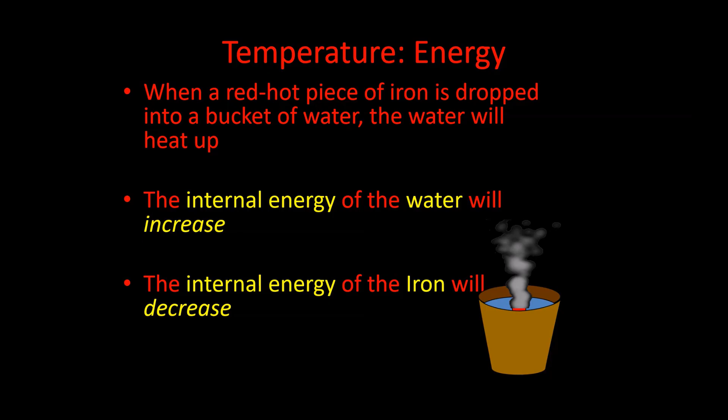In terms of reactions that can take place, some reactions are considered reversible, some are irreversible. Such a thing as freezing water and then subsequently melting it back into liquid state is a reversible reaction. We can take our water in its solid form as ice, melt it into liquid, then reduce the temperature and regain our solid ice state. This is a reversible reaction.

Examples of an irreversible reaction are such things as chemical reactions. So take CH4, methane, and O2, oxygen, and combine those together to get CO2 and H2O, carbon dioxide and water. On the surface, it might seem that you could put H2O and CO2 together and then regain CH4 and O2. This, however, is an irreversible reaction.

The energies and bonding required to take these two, CO2 and H2O, and get the original reactants back are quite complicated. So you'd have to catalyze this reaction and go through a chain of reactions to come back and get CH4 and O2. You cannot simply put these two together, rearrange them, and get these two back. This is an example of an irreversible reaction. You can do this, but it requires a completely different path.

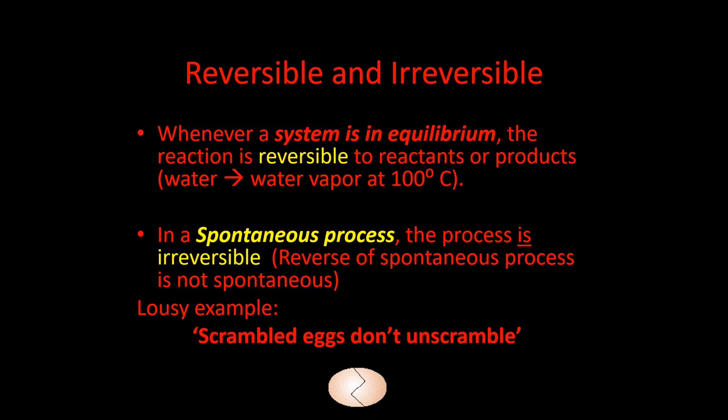An example of this is taking eggs and scrambling them. This might sound a little bit ridiculous on the surface, but it is a good example. If you take an egg in its intact state and then scramble it, you've increased the chaotic state of that egg. You cannot unscramble that egg and reform it and get a nice complete yolk once again. It just won't work. You've increased the entropy of that egg to the point where it cannot be reformed.

And these are really all statements that fit within the second law of thermodynamics, or at least pertain to it. The second law of thermodynamics really states that the entropy of the universe is always increasing in a spontaneous process and remains unchanged in an equilibrium process. Really, what the second law of thermodynamics tells us is which processes in the universe can occur and which cannot.

And we can look at this on a variety of levels. We will eventually take it down to the level of just looking at thermal cycles. But right now, there's bigger pictures to look at. So in terms of entropy, what is it? Entropy is a measure of randomness or a measure of disorder. If you increase disorder or increase randomness, you increase the entropy of your system.

So the entropy of any isolated system will always increase over time and approach some maximum value. If you leave a system alone and do not maintain it, it will tend towards a state of greater and greater chaos, less and less order. For instance, you could look at this on the macroscopic scale. What happens if you have a building and don't maintain it and just leave it to its own devices? Eventually, weather and decay will cause it to fall apart. Its chaos will increase. Its entropy will increase.

So the entropy of a thermally isolated system should never decrease. Now, if we mean a thermally isolated system, this is not contravening the previous statement. We're talking about a situation such as a calorimeter, where there's no exchange of energy with the exterior system. We're just taking water inside there and adding metal, then leaving it completely isolated.

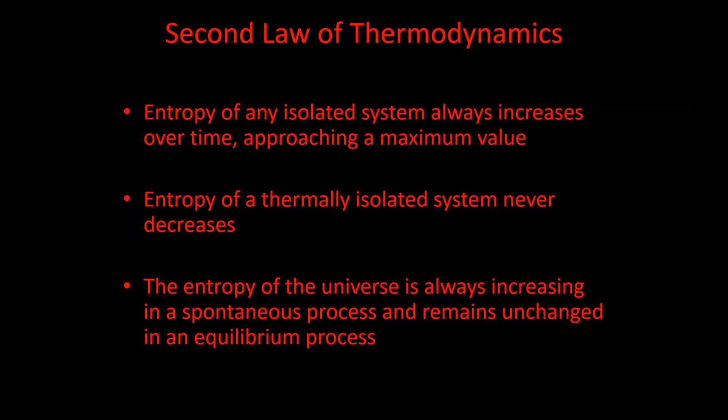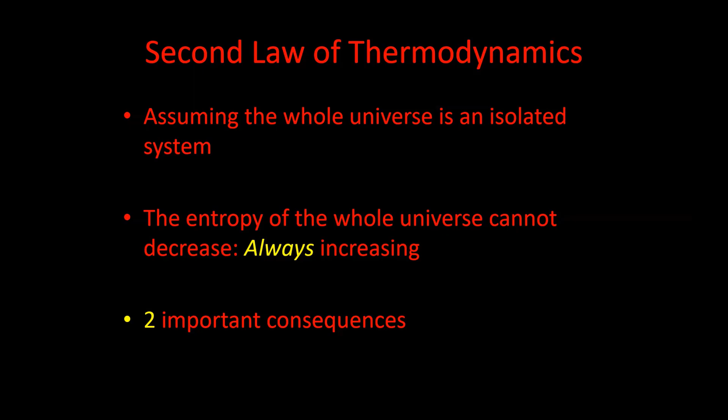The entropy of that system should not decrease, because there's a set amount of energy that is exchanged. A larger statement of this is that the entropy of the universe is always increasing in a spontaneous process and remains unchanged in an equilibrium process. So it really is a statement of conservation of entropy. If we assume our whole universe is an isolated system, the entropy of our whole universe cannot decrease, it's always increasing. And there's a couple of important consequences to this that we will come to.

But when we're talking about the universe, here is the beginning of the universe. Energy was released at the beginning of the universe in a radiative sense. And what's actually happened since is energy has reordered itself and become far less chaotic and reached a state of lower entropy, essentially. And we've got matter.

But energy is constantly being exchanged, and what's happening is the entropy of the universe overall, everywhere, will increase. The entropy of the universe is indeed increasing, and the radiative energy and gravitational energy that we see in the universe today is being converted to other forms, possibly things like dark energy. Eventually we will end up with a dark and desolate universe where all of the energy that we depend on, gravitational, radiative, all of this, has been turned into a form which is unusable to us. But we're talking billions of years in the future, and we're not necessarily worried about this.

Something to think about when you're lying awake in bed at night.

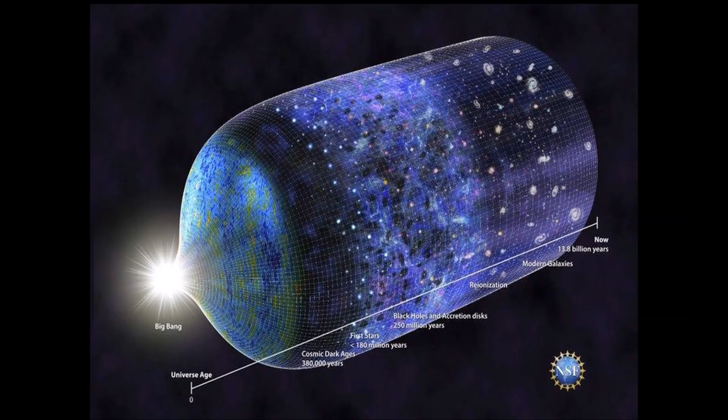So, let's get down to thermodynamics. What does the second law of thermodynamics really say for us in terms of heat and heat transfer? It means that heat cannot pass from a colder to a hotter body. We looked at that with the iron. If we drop our piece of hot iron in the water, the energy flows from the hot iron to the cold water. It would not flow from the cold water to the hot iron.

It's impossible for any device that can operate on a cycle to receive heat from a single reservoir, that means a supply of heat, and produce a net amount of work. That means you can't get work from nothing. Heat must flow from hot to cold, and then you extract work from that process. So we can only get useful work out of heat if it's transferred from a hot to cold reservoir.

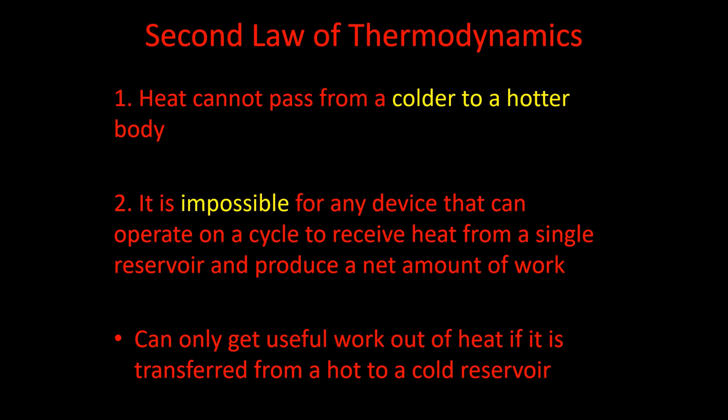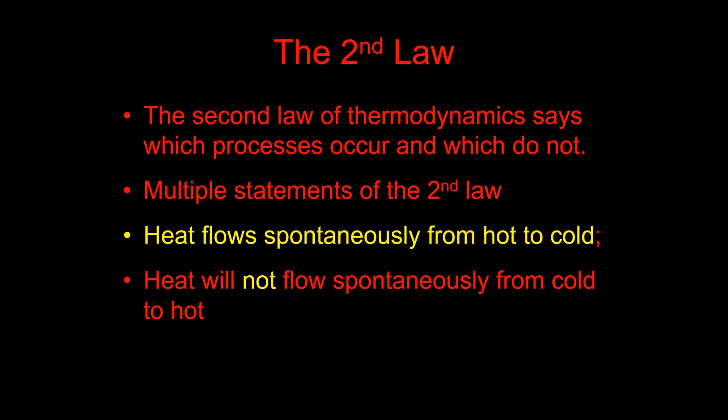So really, what the second law of thermodynamics is saying is which processes occur and which do not. There are many, many ways of stating it. For us, we're going to say heat flows spontaneously from hot to cold and will not flow spontaneously from cold to hot. We can transfer energy from cold to hot reservoirs, but then we will have to actually put work in to achieve this, and we will discuss that later. But naturally, heat will flow from hot to cold.

So there are multiple statements of entropy that you will see in different places. Our formula for entropy, at least one of them, there are two, is that delta S, the change in our entropy, is quite simply put the final entropy value minus the initial entropy value. I'll show you how to calculate S shortly.

Other statements: a quantitative measure of the amount of thermal energy not available to do work in a closed thermodynamic system, that's entropy. What this really states is entropy is kind of an efficiency. It's how much energy is not available for you to extract from your machine. So you have a certain amount of heat, Q, and want to do a certain amount of work, W. But entropy stops you from converting all of Q into W. It's how much energy is unavailable and too chaotic to use.

You can also see entropy quoted as a measure of disorder or randomness in a system. In IT terms, it's a measure of the loss of information in the transmitted message. As we've said before, it's also the tendency of all matter and energy in the universe to evolve towards a state of inert uniformity, very cheerful, and, as we're seeing possibly today, the inevitable and steady deterioration of a system or society. Entropy's units are J/K, joules per Kelvin.

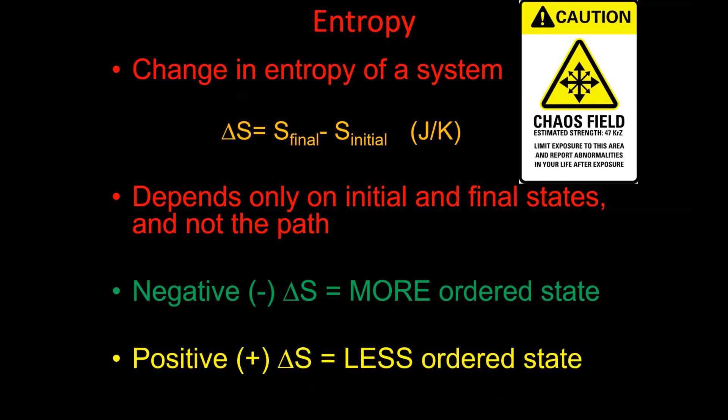So as we said before, the second law of thermodynamics actually holds a lot of different things within it, a lot of different conclusions. So the final fate of the universe, this energy going towards some dark, non-radiative form where we will see a dark and flat universe.

Ice melting to water, or water being frozen back into the form of solid ice. The degradation of your professor's office over a semester.

The Egyptians had this kind of idea, not so much scientifically in the form of entropy, but they actually had two goddesses, Ma'at and Isfet. Isfet being chaos and Ma'at being order, and Ma'at and Isfet were always fighting in the universe as to which one should win, chaos or order, and always coming to a balance. So quite scientific, even though it wasn't really intended. And of course, Little Miss Tidy could become Mr. Messy.

So, typical processes that will lead to an increase in our entropy are the melting of a solid, dissolving a solid in a solution, putting such things as sugar or salt into water and dissolving them, taking a solid and making it into a liquid or a gas, just increasing the temperature of a substance, or when a gaseous reaction produces more molecules. If there's no net change in the number of gas molecules, you can have a positive or a negative value depending on what's going on with the system, but it will generally be a smaller change in S.

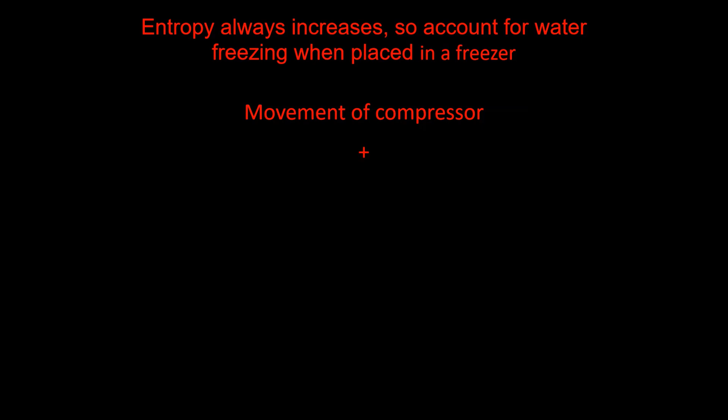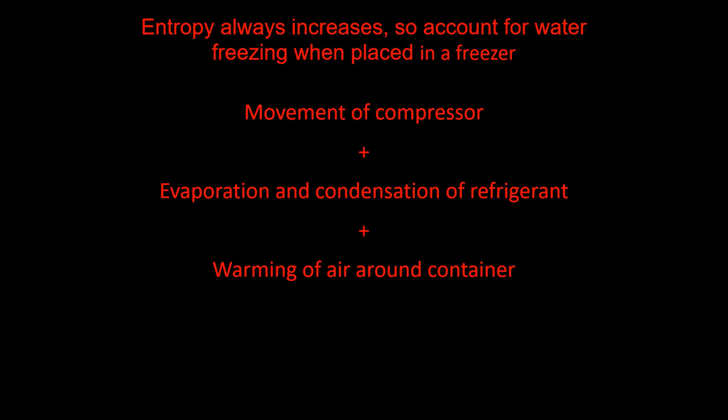So what that means is if we are going to freeze something, we usually pump some kind of refrigerant through the freezer, and that refrigerant will take energy out of the system and allow you to freeze your water. That means the movement of the compressor plus the evaporation and condensation of that refrigerant plus the warming of the air around the container, because we have to take that warmer energy and dump it somewhere, usually warming the air as the refrigerant lets its energy go, gives us a net increase in the entropy of the universe.

So we reduce the entropy of the water at the cost of increasing the entropy of the universe in 3 locations: by the movement of a compressor, the evaporation and condensation of a refrigerant, and the warming of air around the container.

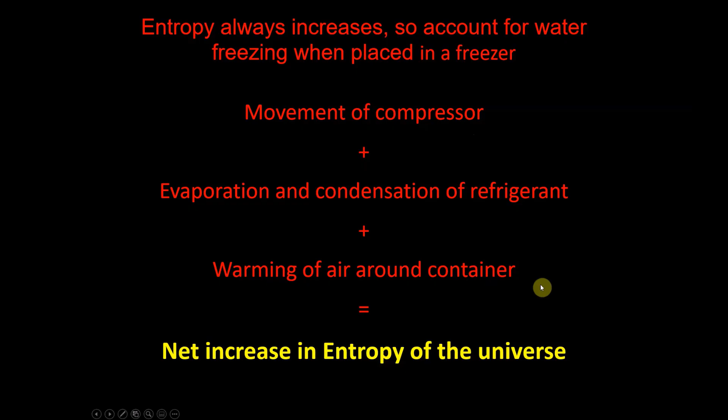We said essentially delta S was S final minus S initial, a relatively simple calculation. So how do we get our S values? Well, our S values actually come from a study of molecular structure and quantum mechanics, which allows us to calculate entropy theoretically for most systems.

Most substances will use some kind of calorimetric measurements, as per the calorimeter, at pretty low temperatures to achieve this. So our equation becomes delta S equals Q over T. In most cases I've used uppercase Q, here it's lowercase, but this does not really matter. Q here is the heat energy absorbed by the system, T is its overall temperature, and delta S is its entropy. So entropy is a ratio of how much heat energy is in the system to how much the temperature increases.

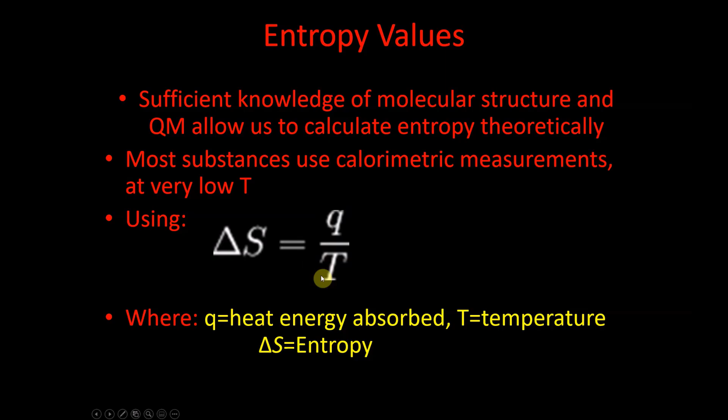So there's our equations together. Delta S can be S final minus S initial, or delta S equals Q over T. Since Q is heat energy and T is temperature, that means S comes out in J per K, or joules per Kelvin.

The entropy of a system really depends on its internal energy and external variables such as volume. We're coming to another equation that involves the energy of a system and relates that to S. In some thermodynamic limit, you can get an equation relating the change in internal energy to the changes in entropy and things such as volume. That's the fundamental thermodynamic relation.

And here it is: if the volume is the only external variable, then the relation becomes delta E, the total energy of the system, equals T delta S minus P delta V. T is the temperature, delta S is your change in entropy from either formula or both, P is the pressure, and delta V is the change in volume. So we've made a few relations here.

Let's take a look at a problem. We have a 10 kilogram block of water ice taken from a refrigerator at 0 Celsius and placed in a warm environment. Several minutes later, exactly 50% of the mass of the ice has melted, becoming water at 0 Celsius. What is the change in entropy of the ice-water system? So we're melting a 10 kilogram block of ice and waiting for 50% of the mass to melt. What's the change in entropy?

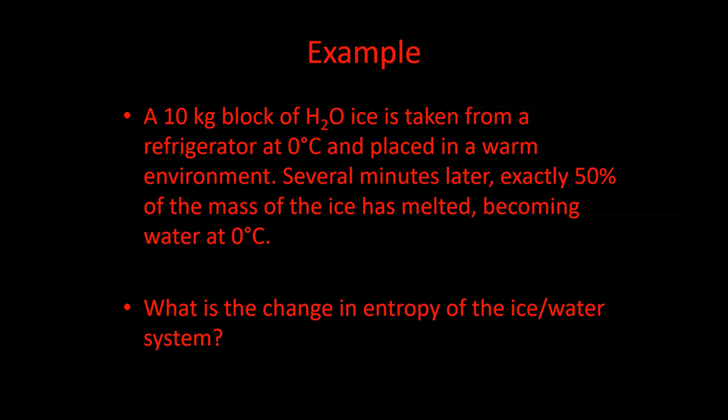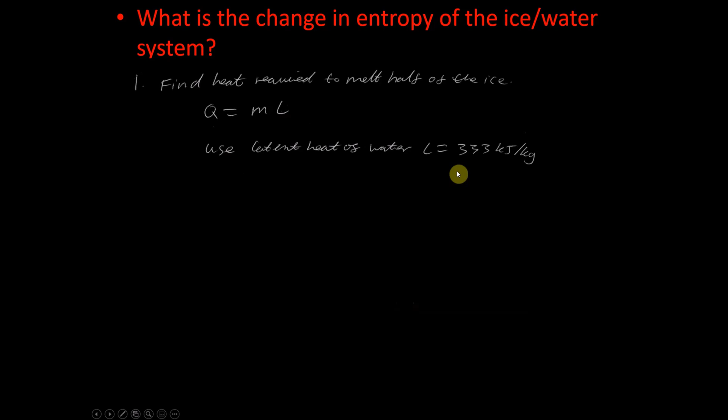First, let's find the heat required to melt half of the ice. You should be harkening back to what we discussed in calorimetry and realize this is a melting situation. So Q is equal to mLf, where Lf is the heat of fusion. The latent heat of fusion for water is 333,000 joules per kilogram, given here in kilojoules. So Q equals mL.

The mass we care about is when 50% of our 10 kilograms is gone, so this is 10 kilograms over 2, times 333 kilojoules per kilogram. This gives us 1,665 kilojoules. This gives us Q.

We're not done yet. We know the temperature of our system is 0 Celsius, which translates to 273 Kelvin. We have 1,665 kilojoules divided by 273 Kelvin. Converting the kilojoules to joules gives us 6,098 joules per Kelvin. That's how you arrive at delta S, the entropy change for ice moving into water. First find Q, compare that to T, delta S is Q over T.

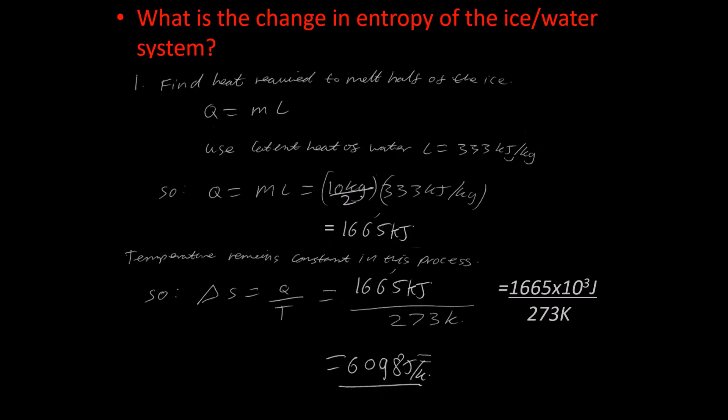Entropy places constraints on the direction your heat transfer can go, and also the efficiency of a heat engine. Delta U, the change in internal energy of a system, is equal to Q, the total heat energy available to the system, minus how much work you can extract. You cannot extract heat from a hot reservoir alone; you must exhaust it to a cold one. So heat must flow from hot to cold, and then you can extract work from it. You can never get 100% of the energy out of this situation, you can never have a 100% efficient heat engine.

So let's look at the second law, and specifically how this relates to things like heat engines.

So when we're talking about a heat engine, we're talking about an engine from which we want to extract useful work. That's the purpose the engine exists for. We have some amount of heat energy at QH, a hot temperature, and we're going to exhaust this to QC, a cold reservoir.

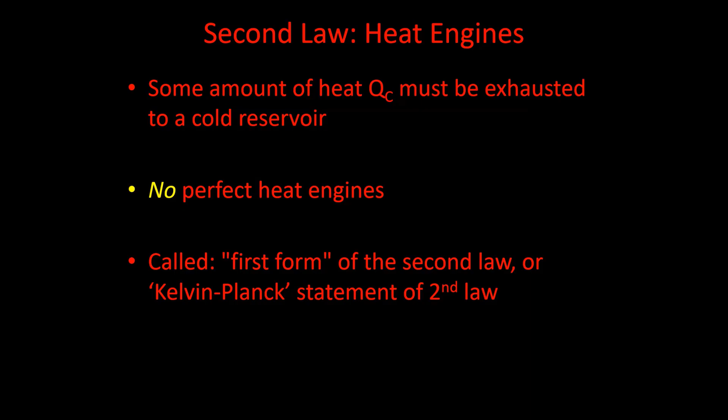When this occurs, we can extract a certain amount of useful work. We can take some of this energy and divert it to do some work. So we're going from 600 to 300, QH to QC. If we have a 600 Kelvin heat engine that exhausts to 300 Kelvin, this means the engine cannot be more than 50% efficient. We cannot take away more than 50% of the energy in the form of work.

We could reduce this to 200. We could change this value and exhaust to ever colder temperatures and increase the efficiency of our system. This system, from 600 to 300 Kelvin, only gets 50% of the work.

This is analogous to creating an engine from a water wheel. In a water wheel, we would have water contained at some height h with energy given to it by the gravitational potential energy of mass times gravity times height. This body of water would fall and impart this energy in the form of kinetic energy to this water wheel. There would, of course, be loss in the water wheel, which we'll ignore.

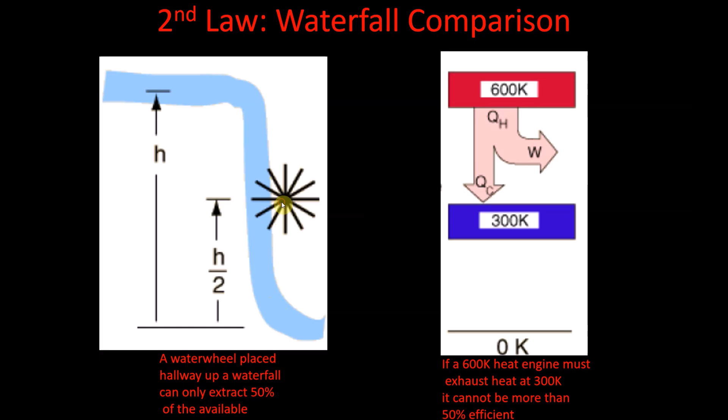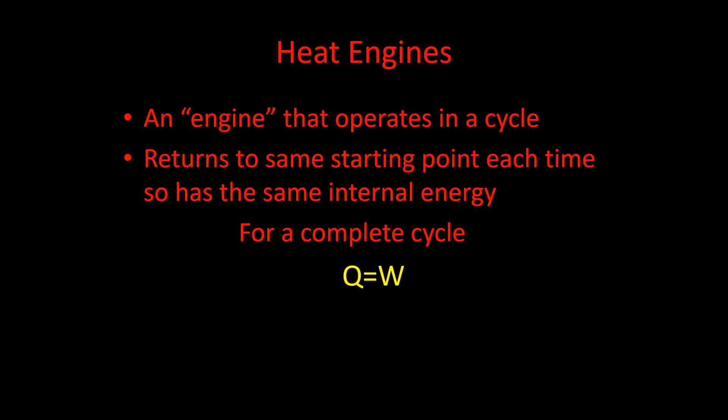So any engine that operates in a cycle is referred to as a heat engine, and this engine will return to the same starting point each time its cycle has ended. This has the same internal energy at the end of its cycle. This means for a complete cycle, the amount of heat energy put out should be equal to the work.

So a heat engine has to have a temperature difference. If the temperature is equilibrated, then the work done in one part of the cycle equals the work done by this other part of the system. So the net work is zero.

We cannot exhaust a 600 Kelvin heat reservoir to a 600 Kelvin heat reservoir. We could go from 600 to 300, or 600 even to 550, which would be very inefficient, but we could do it. But if you have an equilibrated system, then no work can be done.

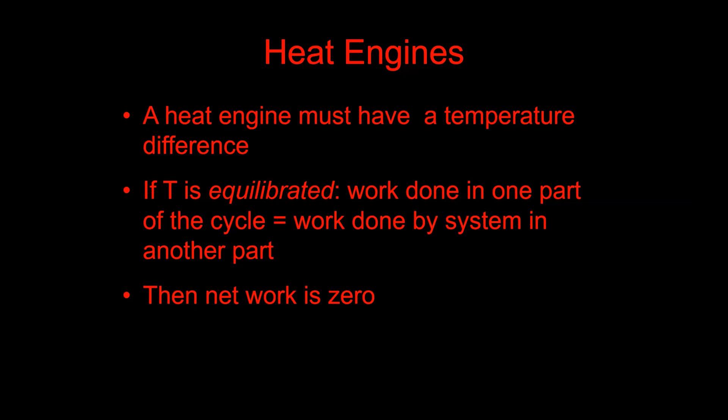So all real heat engines will lose heat to the environment. You cannot extract all of the work from a system. Here's our hot reservoir, and here's Q flowing out. We cannot divert all of this simply to work. We must send a certain amount of energy Q to the cold reservoir and then siphon off what we can in terms of work. The efficiencies here tell you how much work we can take away from this system.

So the efficiency here is either work over QH, the Q at the hot reservoir, which is essentially delta Q, QH minus QL over QH, or E is more simplified, 1 minus QL over QH. Using one of these equations really depends on what variable you're given.

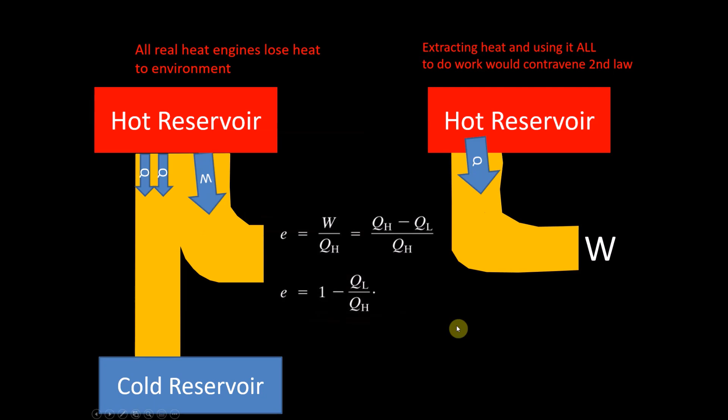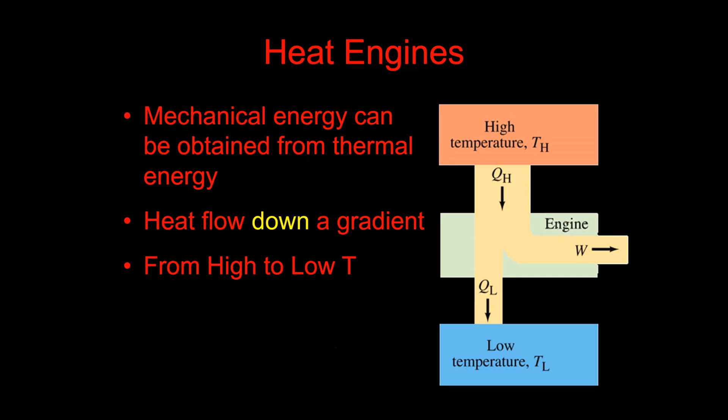We'll see these again. So in terms of a heat engine, mechanical energy can only be obtained from the thermal energy in this system. So heat flows down our gradient from high to low, and we extract useful work, W.

So those were schematics showing the energy flow in a heat engine system. Of course, the engine itself is a little more complex. You do have to have other moving parts, valves and such, and cylinders expanding and contracting.

The losses we're going to talk about are the losses due to thermal energy. We're not going to worry about the inefficiencies of whatever machinery you hook up to the system, which again will result in a loss of energy.

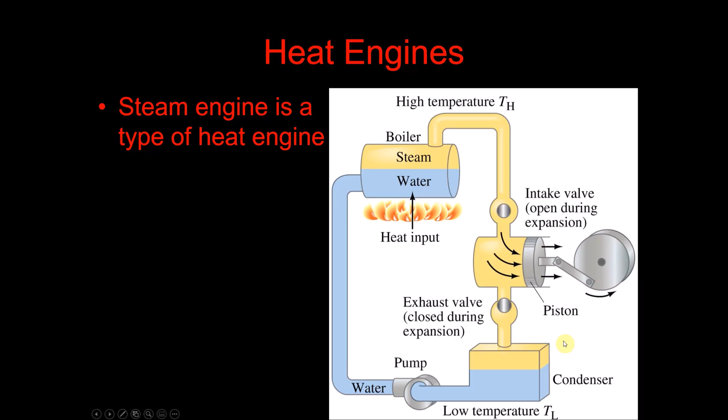So as we said, engines run on a repeating cycle, and the change in internal energy over one cycle is zero because essentially your engine returns back to its original position.

We have a high temperature reservoir which transfers heat, and then we take some of that energy as the heat is exhausted to a lower temperature, a lower energy. We take some of that heat in the form of work.

So in dealing with the work done by a gas, we can look at the work done in a mechanical sense. This means the motion of a piston. In a complete cycle for our system, this piston will come down and then return to its original position.

If our situation is such that the piston moves down and then returns to its original position, S is 0, so work becomes 0. That's not to say this engine has done absolutely no work during its motion. Half a cycle will essentially do work.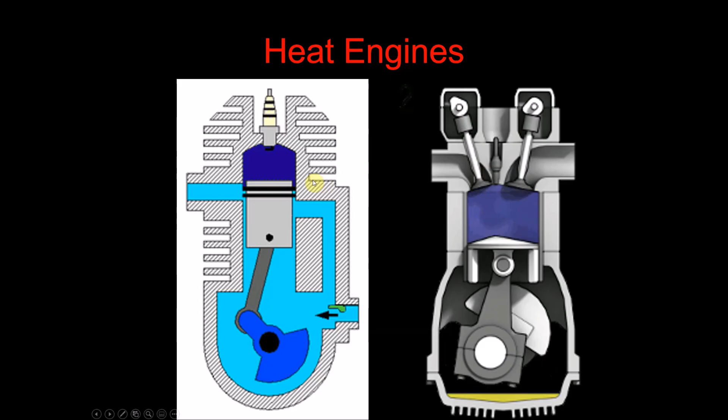In the case of a diesel engine, it's the actual compression of the oil itself that causes it to essentially spontaneously combust without the need for an extra spark. And of course, basic steam engines operated on such a principle. Here we can see the hot air causing expansion and the contraction in the cool air.

So that's the complexity of steam engines, was essentially the mechanisms attached to them to extract the energy. The actual principles on which they're based are those we're discussing here, which are not terribly complex.

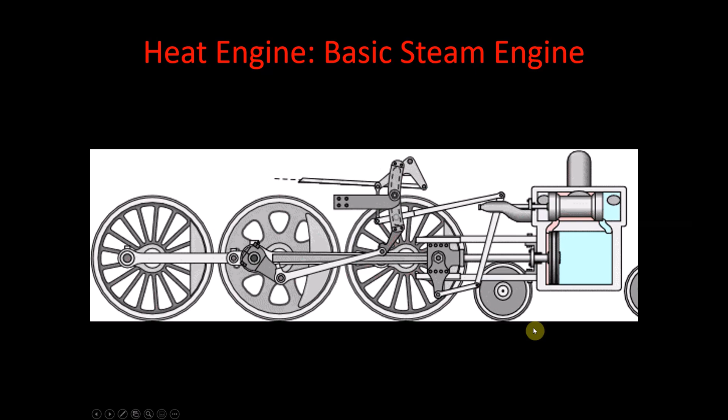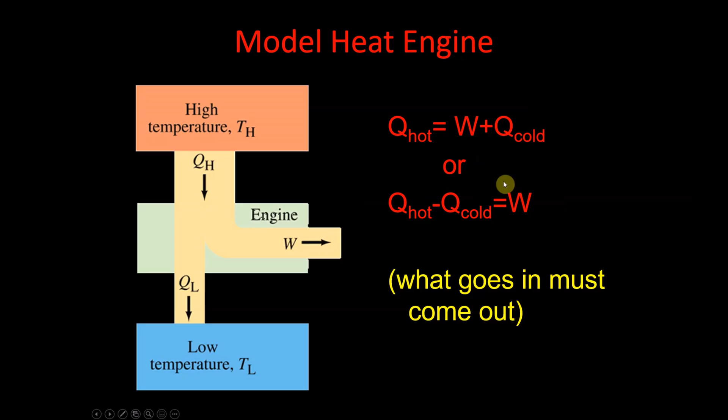But we cannot create energy. We cannot violate the principle of conservation of energy. So the energy that goes in essentially must be the energy that comes out. We are simply diverting it to do useful work. And the equations that dictate this are saying that Q hot, or QH, is equal to work plus QL, Q cold, or Q hot minus Q cold is equal to work by a simple rearrangement. So what goes in must come out.

This is exemplified in something referred to as the Carnot cycle. We'll discuss this in more detail shortly, but cast your mind back to when we talked about PV graphs.

Here is a pressure volume graph, with a hot isotherm and a cold isotherm. Any point on this graph is at the same temperature, and any point on the other is at the same temperature. We're merely varying pressure and volume. As you can see, there are two areas of adiabatic nature, and then we have our hot and cold isotherms.

We can denote points A, B, C, and D on this diagram, so we can talk about what happens from A to B, C to D, D to A, or B to C. We can look at that in terms of this diagram.

Here's the point that we're at in the cycle. Here we are at the adiabatic point, we're causing a compression. We're now at the top of our hot isotherm. Heat is going in, the system is expanding, volume is increasing, and pressure is reducing.

Now we're looking at an adiabatic expansion. Now we're looking at an increasing pressure, and a reducing volume. Adiabatic section, back to A, and now we're looking at heat flowing into the system, causing an increase in volume, and of course a reduction in pressure. That's how the Carnot cycle operates.

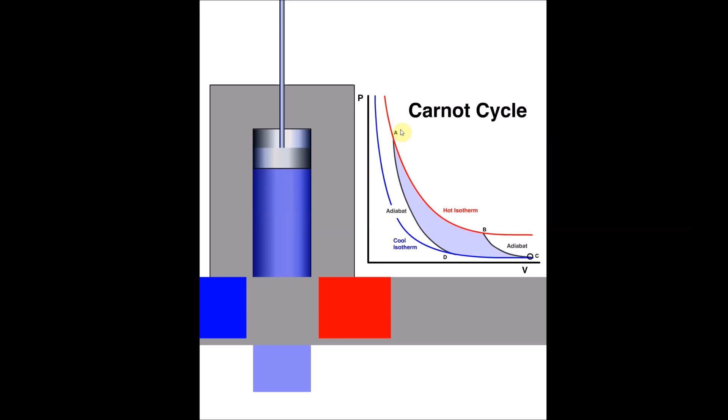We can extract work from specific parts of this, and we'll see that in a diagram shortly where I'll talk about where the work is truly extracted. You can probably surmise that from seeing what's going on here. So work is being extracted from the piston in two parts of this cycle.

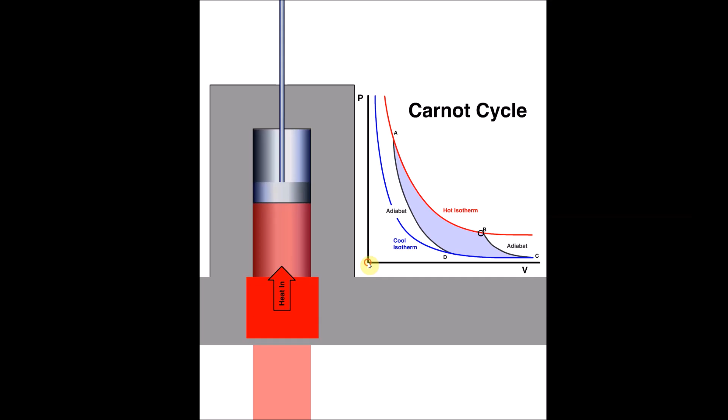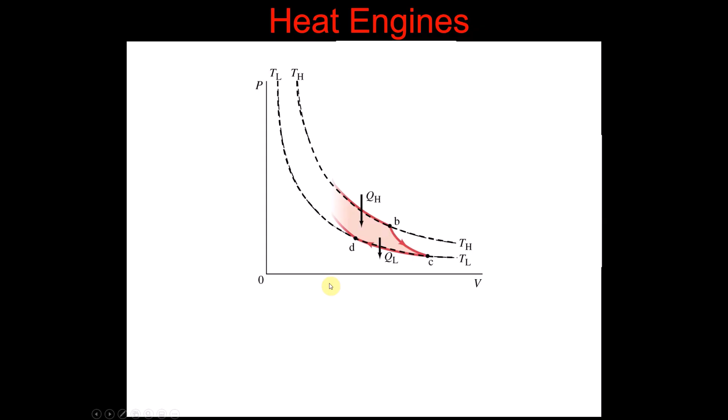In terms of our heat engines, here we're looking at the same diagram again. Here's our two isotherms, hot and cold, in a PV diagram. There's our cycle. Essentially this is Q hot and Q cold, the energy available at the hot and cold parts. This is the cold temperature reservoir, and this is the hot temperature.

At this part of the cycle from A to B, we see an isothermal expansion with the temperature remaining the same. From B to C, we see adiabatic expansion. From C to D, we're looking at an isothermal compression again, and an adiabatic compression when we're going from D to A. Sorry, this is compression here.

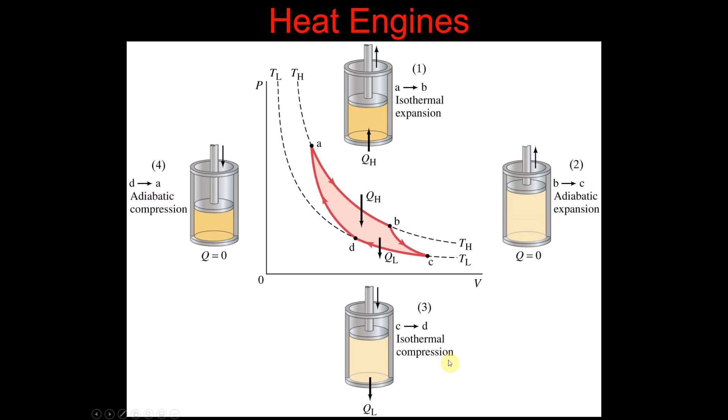And that's what gives us our efficiency equations. So we're going from Q hot, QH, to QL, or Q1 to Q2, same thing. If we look at the efficiency of our heat engine, the maximum efficiency will be the maximum amount of work divided by the amount of heat energy available at the high end of the reservoir. This will equal 1 minus T low over T high, or the difference in the temperatures divided by the high temperature. So essentially, what is our gradient divided by the total temperature at the high end of our gradient.

These are the equations which really denote how efficient an engine is. So the efficiency of the heat engine is really the ratio of the work done to the heat input. How much heat have you got in the system and how much useful work can you get out of it? So E is W over QH.

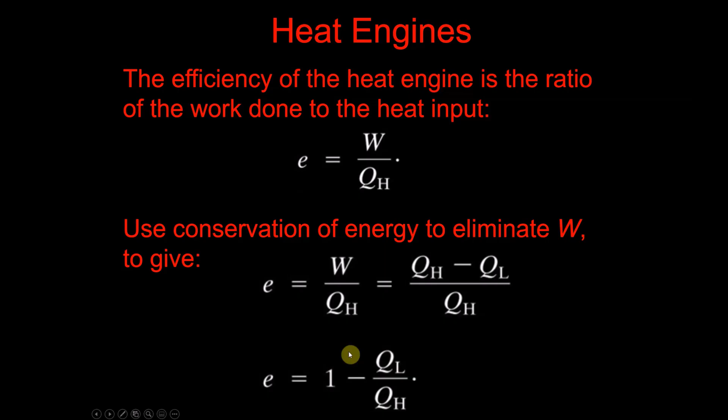You can use conservation of energy here for work and say QH minus QL. So we can say E is W over QH, or QH minus QL over the total energy available at the hot end, QH. These are very similar to the previous equations, which were given in terms of T. These are given in terms of Q. The efficiency is 1 minus QL over QH, which is a simplification of this version of the formula.

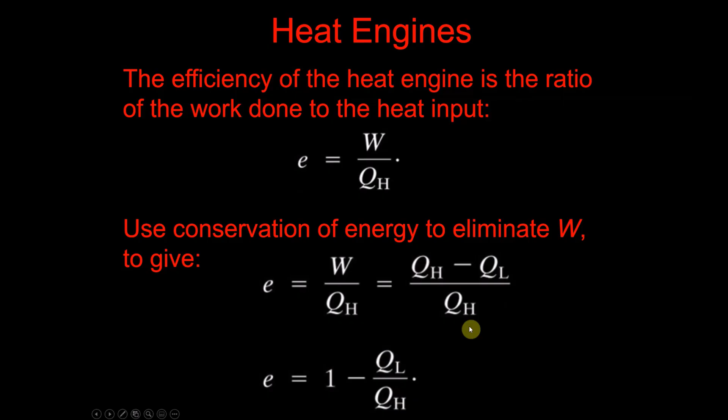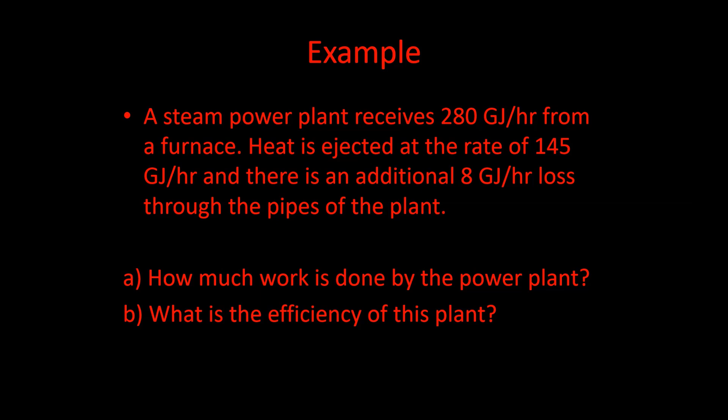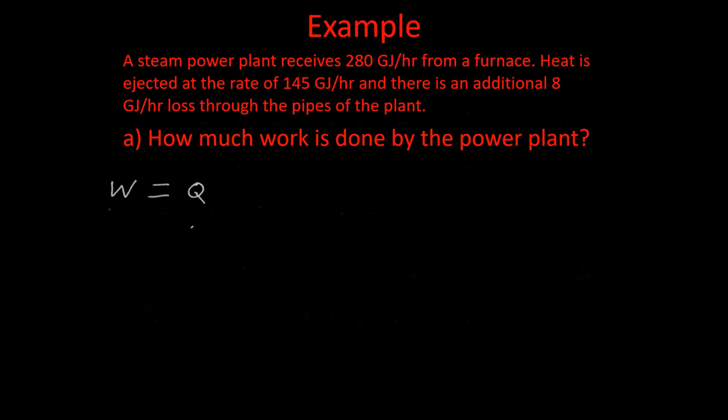So, how much work is done here? Well, work is essentially equal to Q. This is equal to, overall, 280 gigajoules per hour. So this is the work out, equal to the total energy budget. We've got 280 gigajoules per hour. We actually eject 145 gigajoules per hour, and we lose an additional 8.

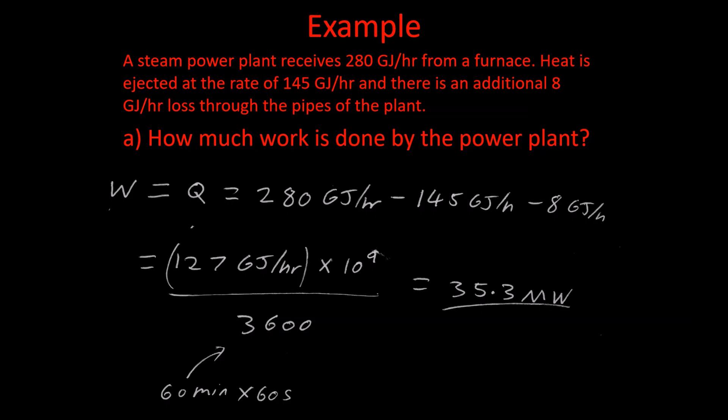So we have to convert this. Here we have our value, so we've subtracted this off and we've got 127 gigajoules per hour: 280 minus 145 minus 8. This is 127 times 10 to the 9 joules per hour. We want to put this in SI units, so we divide by 3,600 — that's 60 minutes times 60 seconds, essentially our per hour. This will give us 35.3 times 10 to the 6 watts, or 35.3 megawatts.

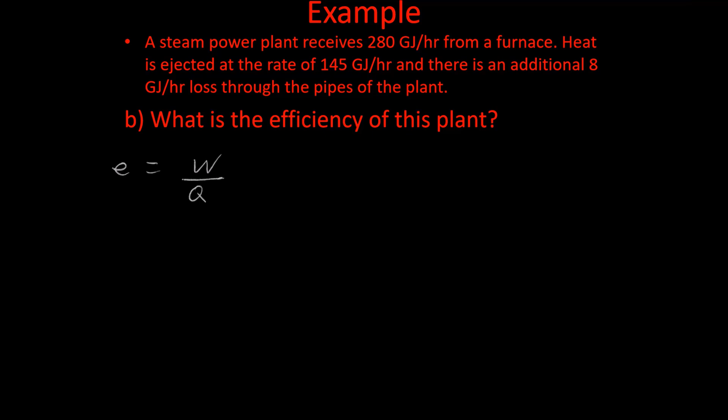Part B asked what is the efficiency of this plant. Well, we've just calculated W. We know that E is equal to W over Q. Substituting in, we have 127 times 10 to the 9 joules per hour, and our total Q of 280 times 10 to the 9 joules per hour. No need for a conversion here to seconds because the ratio should stay the same and the units should cancel, and that gives us a ratio of 0.45. As you can see, the efficiency is simply a ratio of the work to the heat, so we end up with a unitless value.

We could alternately have used 1 minus QL over QH, and stated that this would be 145 plus our 8, times 10 to the 9 here, which is essentially the loss, over 280 times 10 to the 9, and we would have ended up with 0.45. Either of these solutions would be equally valid — it's really a matter of using the values you have at your disposal.

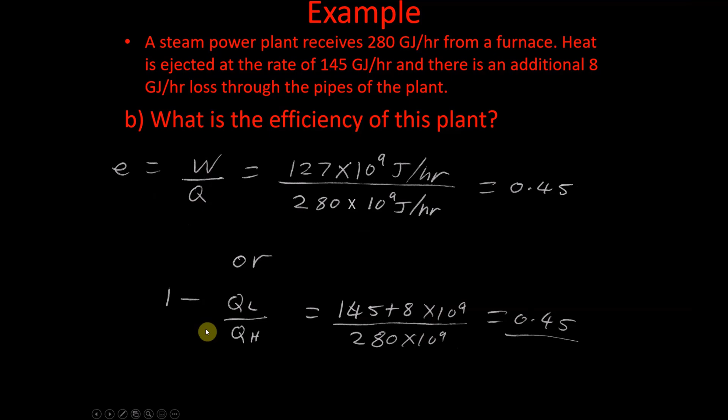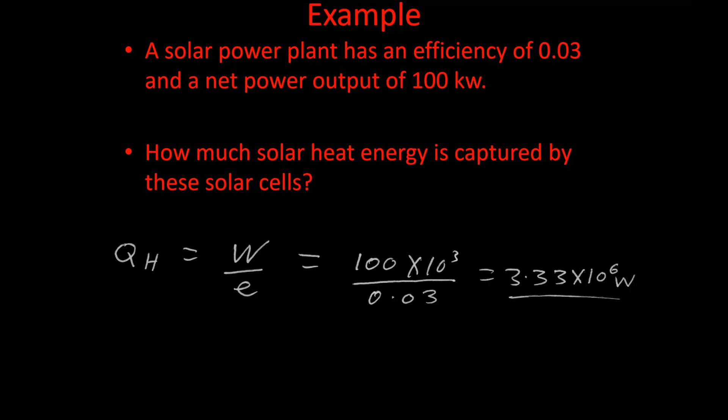So let's take a look at some of these thermodynamic cycles and how these relate to a real engine, and then we'll segue into talking about how we can do the opposite of a heat engine and essentially have a refrigerator. A Carnot engine is essentially a 4-cycle heat engine. We've already looked at these, but we didn't really call them Carnot cycles. This is where we were looking at our isotherms at different pressures and volumes with our adiabatic expansions and compressions. This is a system known as a Carnot engine.

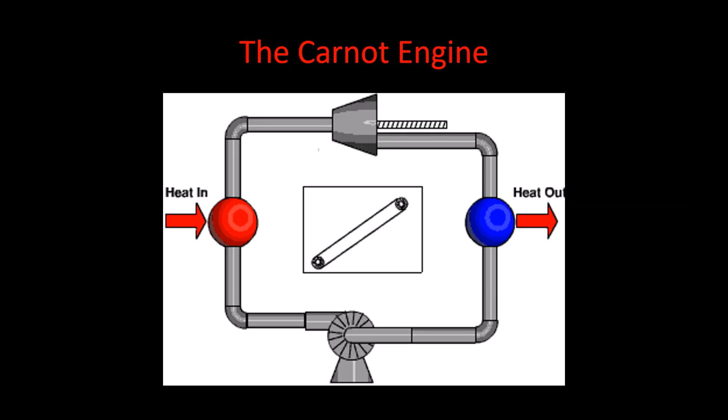The Carnot cycle, which was really put together by Nicolas Carnot in 1824 — here seen in his younger days in his military uniform — was a thermodynamic cycle that really looks at how heat engines transfer energy from warm to cool and how much energy you can convert into mechanical work, and of course, how we can reverse such a cycle.

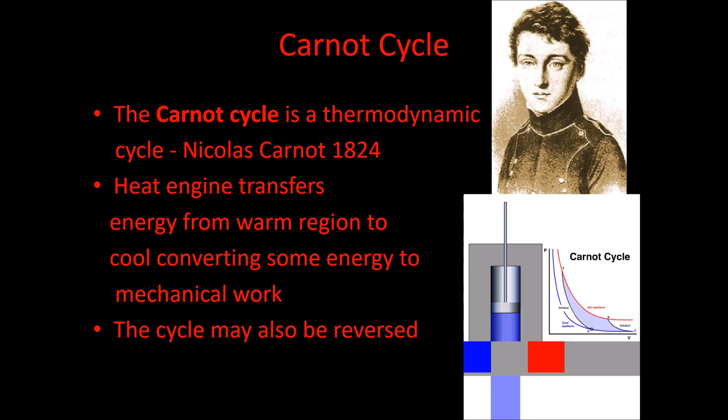So the Carnot cycle really looks at the heat engine as a PV diagram, a pressure volume diagram, with our hot and cold isotherms. We can then look at the expansions and compressions and which parts of the cycle we extract work from. And we already looked at that animated slide where we saw those different parts of the cycle.

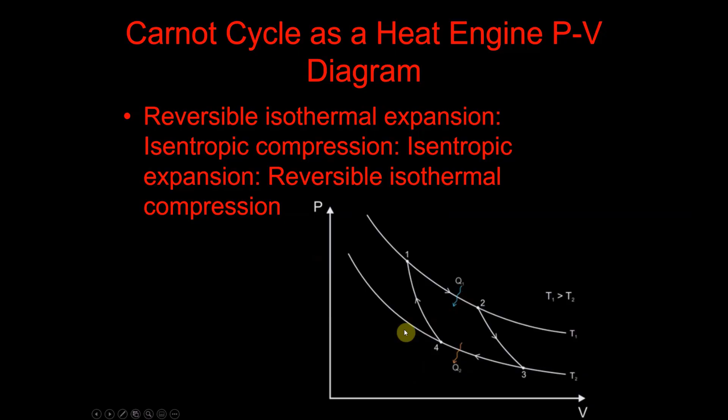What I really want to do is show you exactly where work is done on the system or by the system, and that's what this part of the slide is really showing. For a real heat engine here, we're going to lose heat to the environment. We're going to exhaust our heat energy to a cold reservoir and extract a certain amount of work.

Where do we actually extract that work? We extract it on the part of the cycle where work is done by the gas. Here, along this hot isotherm, volume is essentially increasing and pressure decreasing, so pressure here is going down. This is the point where our cycle gives us energy that we can convert into work.

Heat is then extracted from the system from 3 to 4, so no work is being done here. Then we're doing work on the gas, essentially heating our system up again so that we can extract more work. So the total work done for this cycle, because the work done on the gas here should equal the work done by the gas, is zero.

But we are getting work out of our system right here. And the efficiency, how much work we can get out of it, is governed by the equations we used previously: E equals W over QH, or QH minus QL over QH, or E equals 1 minus QL over QH, which of course you can always express in terms of temperature, as we saw in a previous slide.

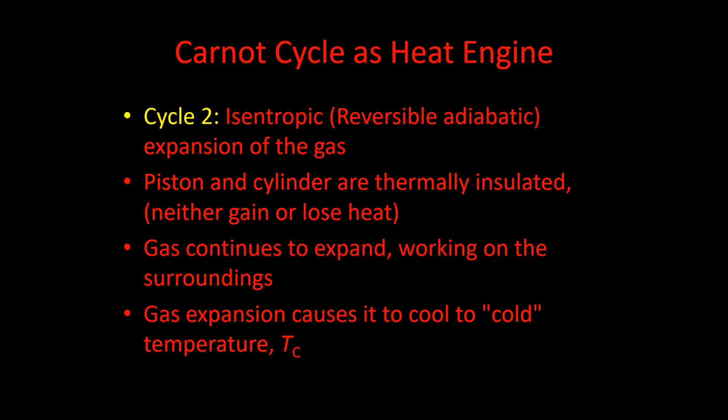In cycle 3, we're looking at a compression of the gas at the cold temperature, and then the surroundings do work on the gas, causing the heat to flow out of the gas to the low temperature reservoir.

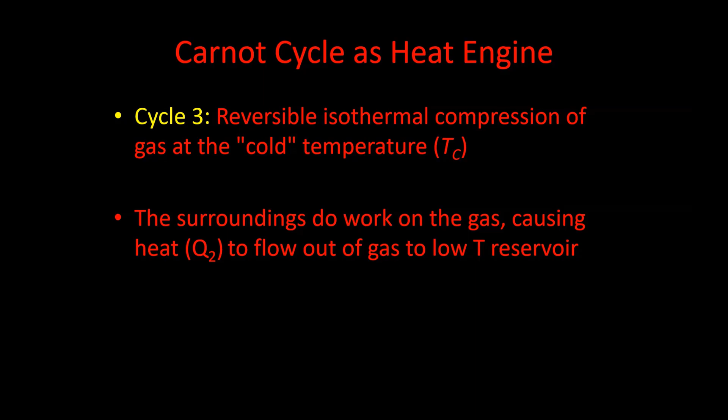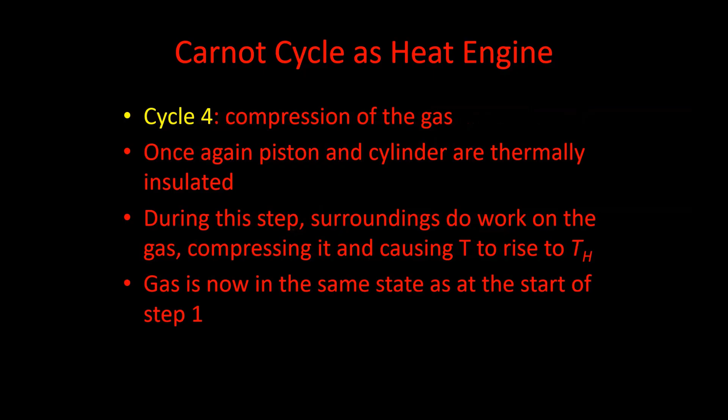Then in cycle 4, with the piston and cylinder thermally insulated, the surroundings do work on the gas, compressing it and causing T to rise to TH. The gas is then back at the beginning of the cycle.

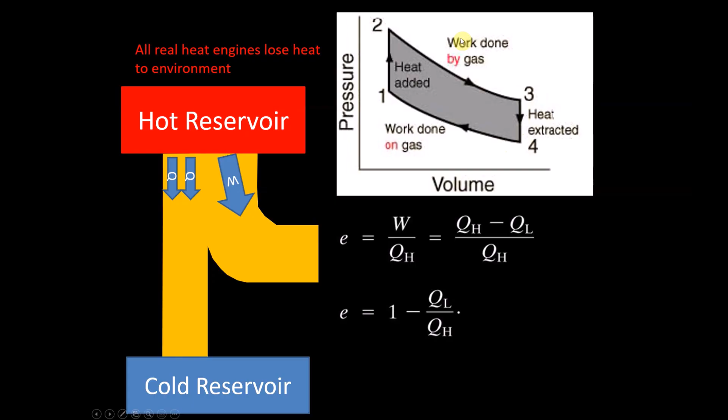This is summarized here in our PV diagram with these particular annotations. So I would definitely, rather than memorizing those four slides, return to this and think about where heat is being added, where it's extracted, where work is done by the gas, and where work is done on the gas.

We're not completely free of steam engines in the modern age. We may not see them in the street or pulling carriages of passengers anymore, but we still do use steam in a very valuable capacity.

Here we're actually looking at a generator which provides electricity, the kind of thing we're getting come out of the wall, and this would be an industrial generator. We actually do have a situation where we use either fossil fuels to release energy and create steam.

That steam is then pushed through a series of pipes to higher pressure and turns a turbine, or we could use a nuclear system where we essentially use nuclear reactions to heat water, create steam, and then push that steam through a turbine. This turbine will turn, which will in turn spin a generator that generates electricity. So we are still essentially using steam in a very important capacity.

Here we're at TH, and then we're exhausting down to T low from the low pressure steam from the boiler.

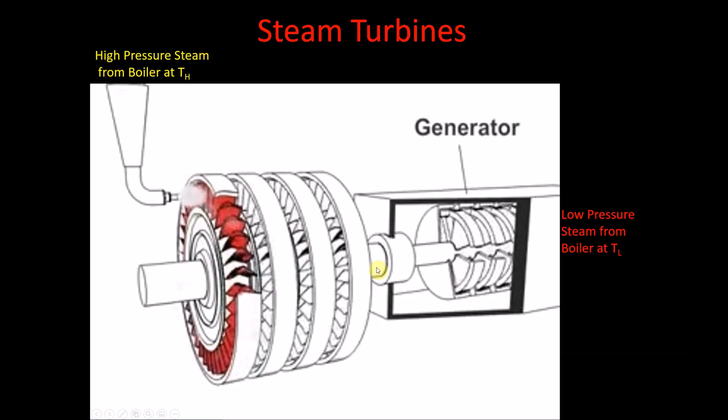As we mentioned during our discussion of the Carnot cycle, we can actually reverse our reaction. That means instead of moving heat in one direction to get work out, we can reverse the reaction to pump heat from one location to another, cooling one location. Heat will only flow down a gradient from a hot place to a cold place. When we did that with our engine, we flowed from hot to cold and extracted work.

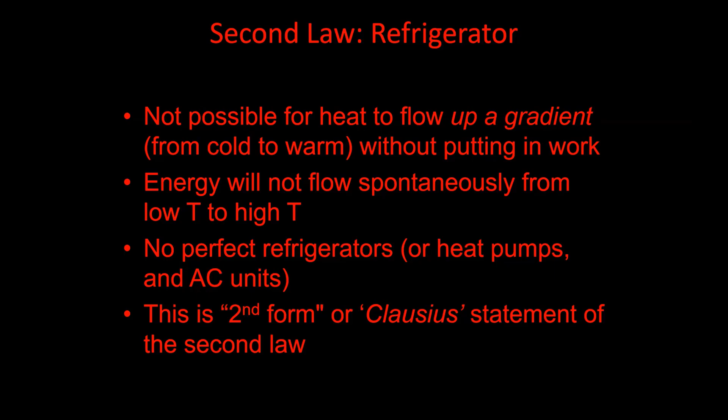What we can do in the case of something like a heat pump or an AC unit is reverse the situation: put work in and force our gas from cold to hot. This is a reversal of the diagrams we saw previously. We're putting work in and forcing Q to go from cold to hot, forcing cold gas into a hot reservoir. That requires us to put effort in, to put work in.

You have to plug in your air conditioner, and then combined with a refrigerant and a fan pushing air over that refrigerant, you will end up with a cooling of the air, and cold air being introduced to a warm room.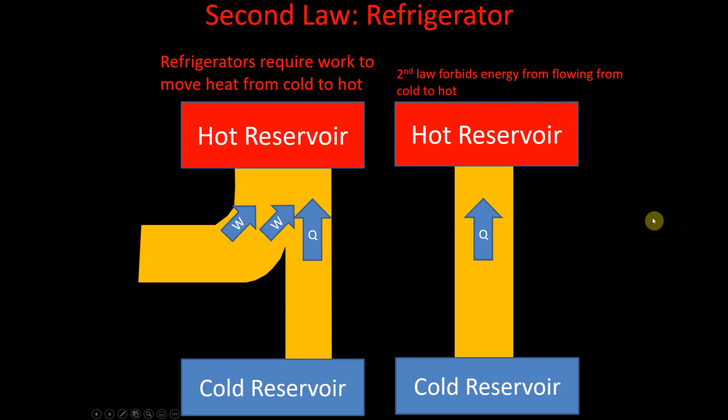We cannot simply go from cold to hot. The second law of thermodynamics forbids energy from flowing this way, so we have to put work in to make this reaction possible. This will not happen spontaneously in nature.

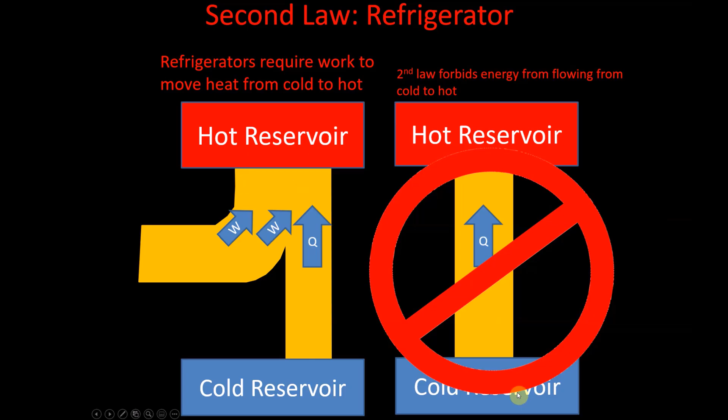So heat pumps or refrigeration systems can be thought of as a heat engine operating in reverse. Most common types of heat pump work by using some kind of refrigerant. You need to remove thermal energy from your system. Usually heat goes into expanding a gas, expanding a refrigerant. That refrigerant is then pumped away and the heat is allowed to dissipate into another reservoir.

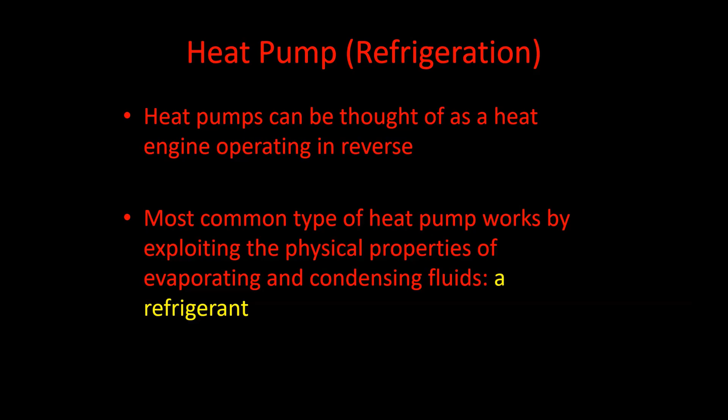If we take a common refrigerator such as this, here we have a motor pushing the refrigerant through these lines. As it goes in here at low pressure through this expansion valve, the Q, the energy from inside the refrigerator, goes into expanding the refrigerant in these coils. That vapor from the refrigerant is then allowed into the motor here, pumped through and allowed into the pump that's powered by the motor. This is then pumped through this series of vanes and allowed to be exposed to the outside environment.

This means energy is absorbed by the refrigerant as it runs through this part of the cycle, and then it's emitted by the refrigerant as it comes through here. This is a specific chemical which expands readily and lets energy flow out of it quite readily. So energy is absorbed here by the refrigerant in this part of the cycle, and it's emitted from the refrigerant here. That's what these metal plates, these vanes, help do in terms of allowing heat to radiate off.

Here the refrigerant is under low pressure and absorbs energy. Here it's under high pressure and allows QH to vent to the outside.

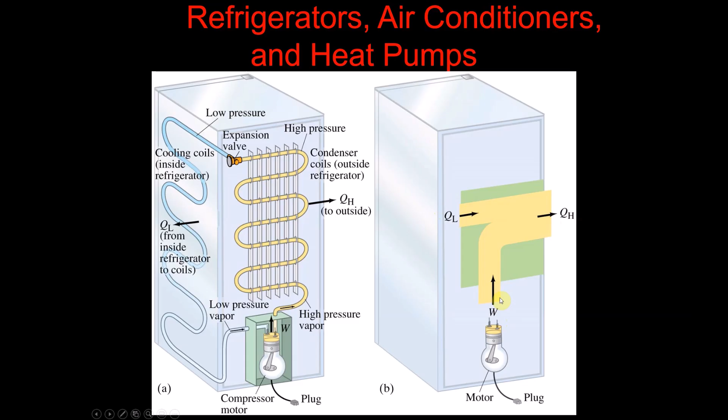This is a typical kind of AC unit you might see. Here we have a condenser and an evaporator. The evaporator is taking energy from the air itself. It goes through the compressor, goes through the condenser, and warm air runs over the fan here, and this air is then cooled by the evaporator and moved outside and lost by the condenser.

This is why if you have a window unit air conditioner, it has to hang out of the window, because the fan is providing cold air by running the air over the refrigerant and the evaporator, allowing the refrigerant to cool the air, and then running down through the condenser, dumping that heat outside, and then providing you with cold air.

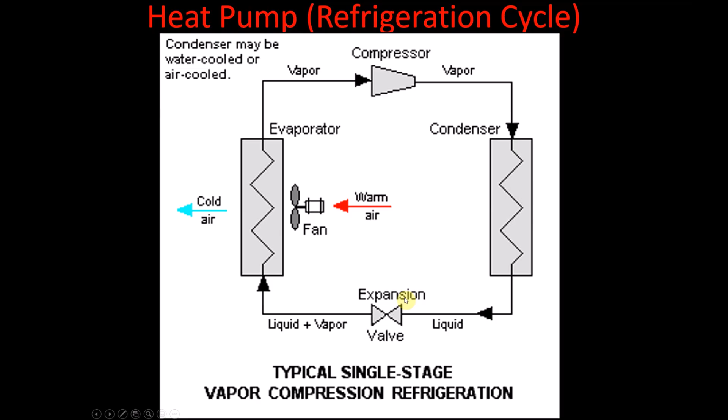Let's take a look at one final example. Here we have a house to be cooled by an air conditioner with a COPR, a coefficient of performance of the refrigerant, of 2.5. The house contains 800 kilograms of air at an initial temperature Ti of 32 Celsius. The air in the house is to be cooled to 20 degrees Celsius in 15 minutes.

Pretty impatient. So, using C for the air, this is the C value, the coefficient here of 0.72 kilojoules per kilogram Kelvin. This is the specific heat of the air at 20 degrees Celsius. So we do need specific heat, to harken back to a previous class. So how much heat is removed by the air conditioner, how much power is input, how much work is put in, and at what rate is the heat ejected.

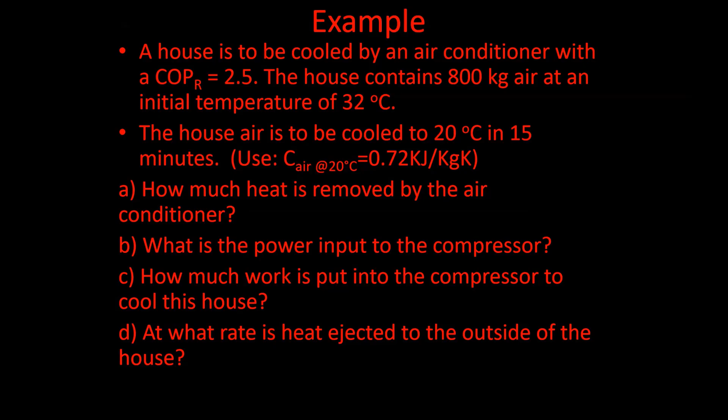Part A, how much heat is removed by the air conditioner? Well, we have here a C value for the air, we have a specific heat for the air. So Q is essentially equal to delta U, the change in energy. This is going to equal MC delta T from our previous calculations.

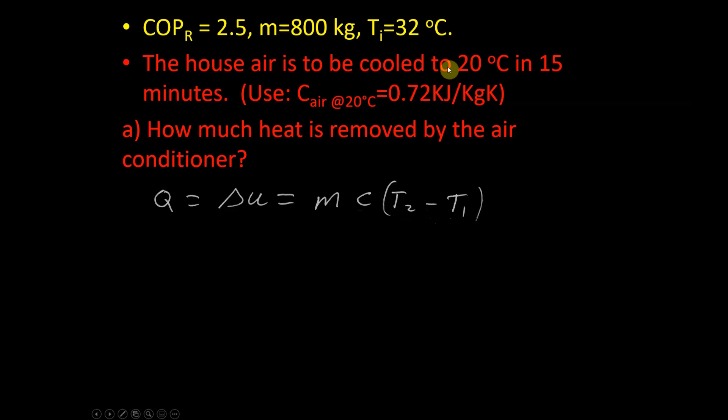Our delta T, of course, we have 32 to 20. Our T2, our final temperature though, is 20. So this is inverted compared to usual, and this is going to be 20 minus 32. We have mass, we have C. C here though is given in kilojoules, so this will have to be 0.72 times 10 to the 3 joules per kilogram Kelvin times delta T.

This is going to equal then negative 6,912,000 joules. This is negative because heat is being removed by the air conditioner, and it's negative because this delta T value here will be negative and change the overall sign of this calculation. This means QL overall, how much heat is removed, the total amount of heat, is just the modulus of this, 6,912 times 10 to the 3 joules.

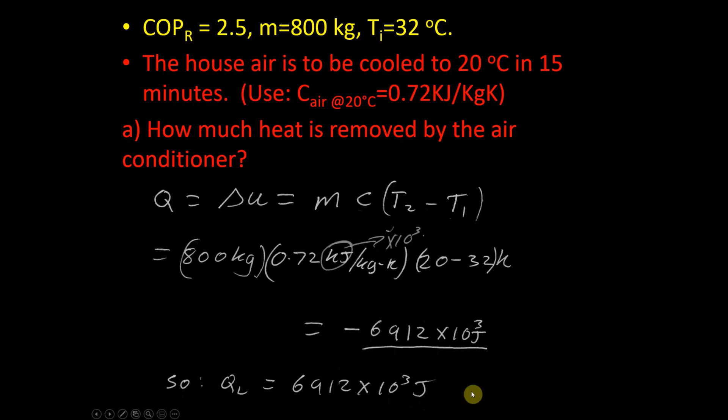Part B, what was the power input to the compressor? Well, QL, first of all, is going to be 6,912 times 10 to the 3 joules. We know that's the energy we just calculated, but power is energy per unit time. So this 6,912 times 10 to the 3 joules over 15 minutes. We of course want to do this in SI units, so we take our 15 and multiply it by 60 seconds. So 15 by 60 gives us 900 seconds.

So 6,912 times 10 to the 3 joules over 900 gives us 7.681 times 10 to the 3 watts, or 7.681 kilowatts.

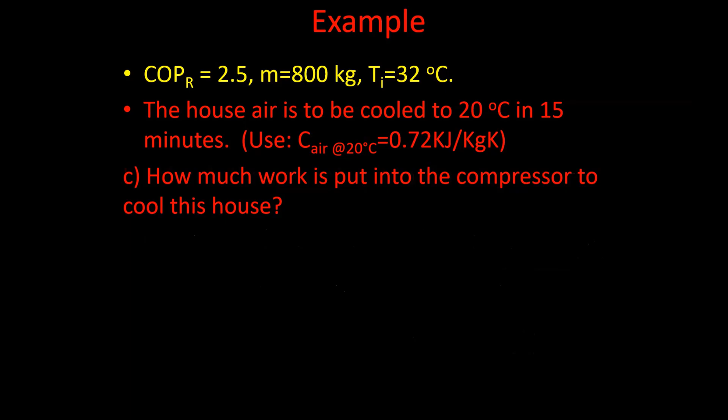Part C asked us, overall, how much work are we going to put into the compressor to cool this house? So how much work is this thing going to do, and how much electricity is it going to use to cool my house down to 20 Celsius in 15 minutes? Well, quite simply, work is QL over COPR for a refrigerator. So remember, this is essentially the efficiency of our refrigerator, and this is the energy at the low end of our temperature spectrum. This is going to be 3.07 times 10 to the 3 joules.

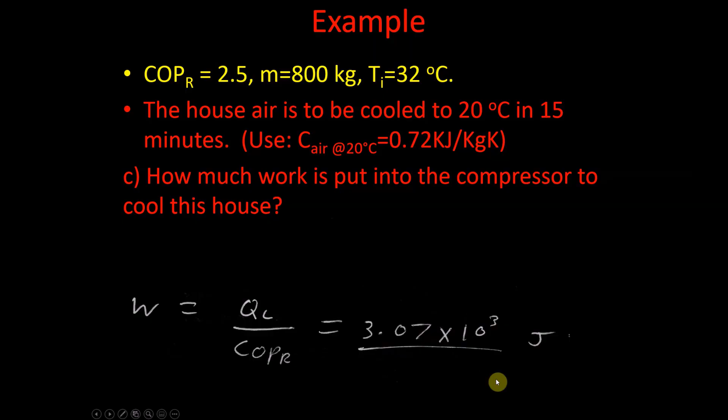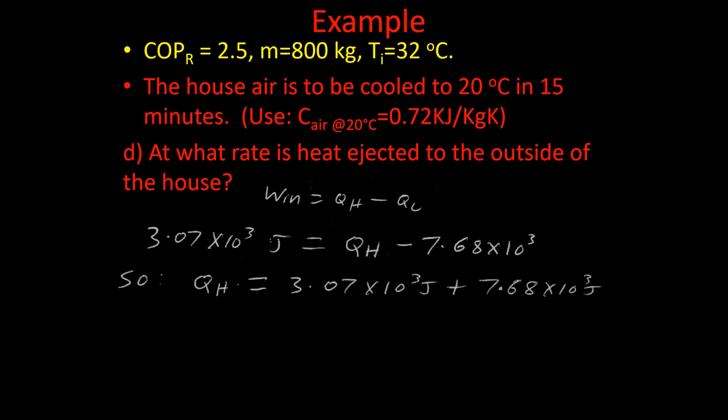Part D, the final part now, and the end of this lecture. At what rate is heat ejected to the outside of the house? Well, the work put in is QH minus QL. We already know the work put in is 3.07 times 10 to the 3 joules from part C. This is equal to QH minus QL, which we also calculated as 7.68 times 10 to the 3 joules. So QH will be 3.07 times 10 to the 3 plus 7.68 times 10 to the 3, which overall will give us 10,751 watts, or 10.8 kilowatts.

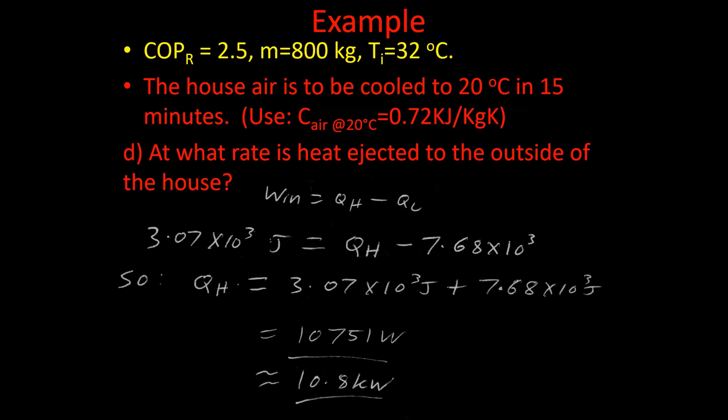And that really takes us to the end here, our conclusion in terms of discussion of thermodynamics.